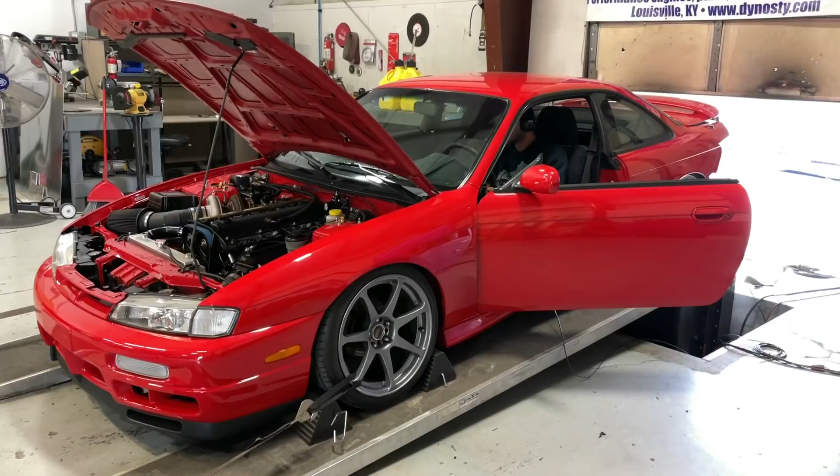Dude, my anxiety is way higher than the ceilings. Oh, usually that means it's dyno day.

All right, so it's early Saturday. In the performance industry, you don't get a ton of time to work on your own stuff. But today's the day, so the S14 is on the dyno.

We are doing engine break-in, and then we're gonna see what kind of power it's gonna make. I don't know what it's gonna do. It's a BorgWarner S300, like a 6673 is what it equates to. R154 trans, piston rod 2J with a 1JZ head.

I'm kind of excited for this. I'm a little excited for this. No long drawn out intro, just going straight to the business, baby. No clickbaity nonsense, just ready for some power.

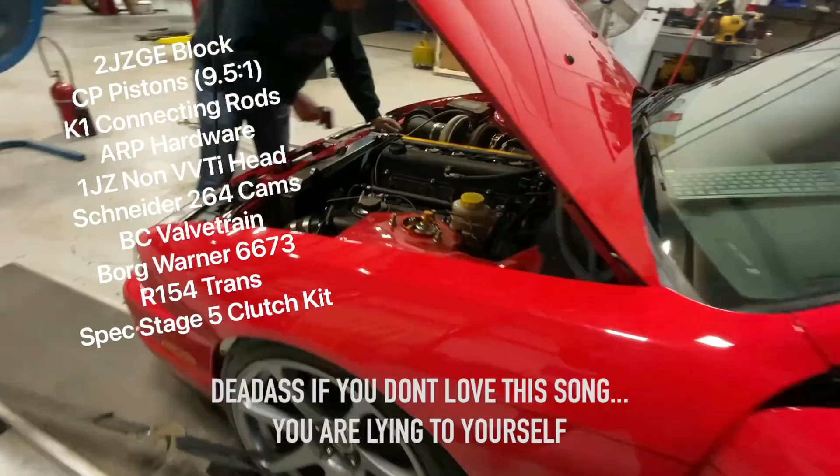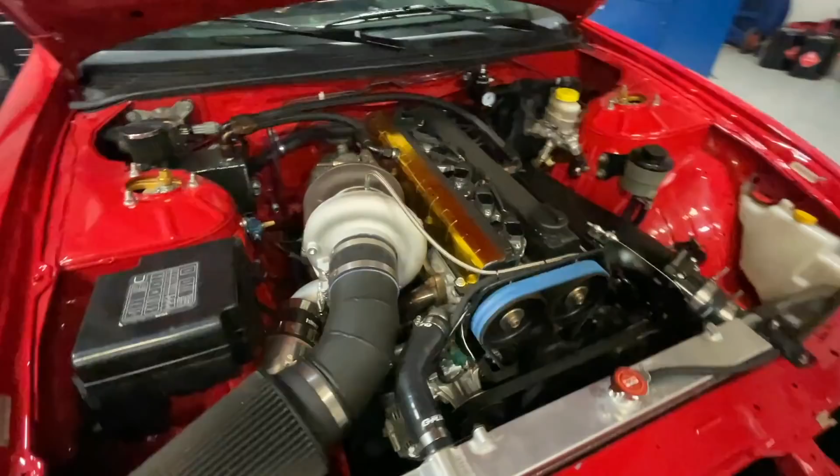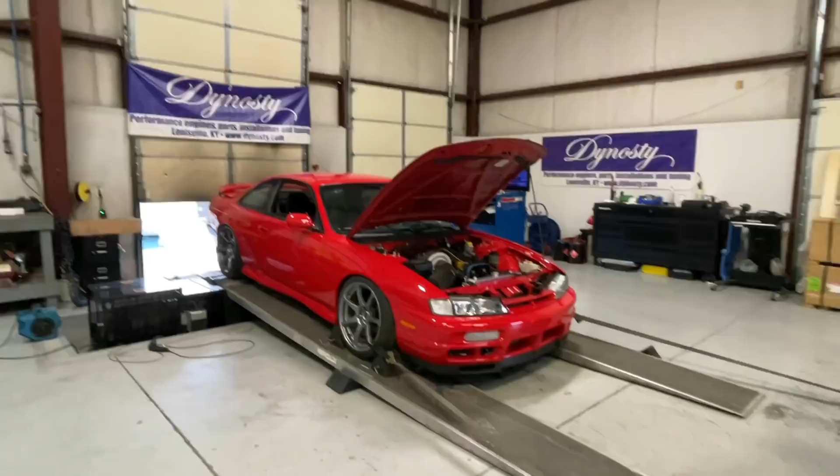I got no idea what wastegate springs are in it. I have no idea what's about to happen. So this pull, I think, is just going to be to see where boost is. And the clutch is a 6-puck spec, so if it looks awkward on the dyno, that's why.

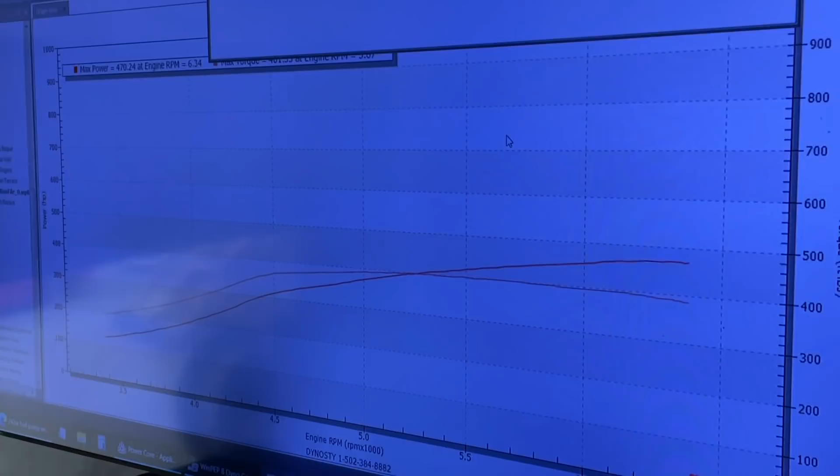I still didn't see torque yet, but the combo, just to review, is BorgWarner S300 SXE Supercore, a 9180 is what they call it, but it's effectively a 6673. So I expected it to be a little bit lazy. On wastegate boost, it's sprung for 11, 12 pounds, and that's what we just ran with super fat AFR across the board just to see what it would make for boost. It's already doing pretty damn good. So we're gonna be, in my opinion, fuel pump limited today because all it has is a single Hellcat fuel pump. Admittedly, with 2 Hellcats, I've made 1300 wheel, but he's about to make another rip.

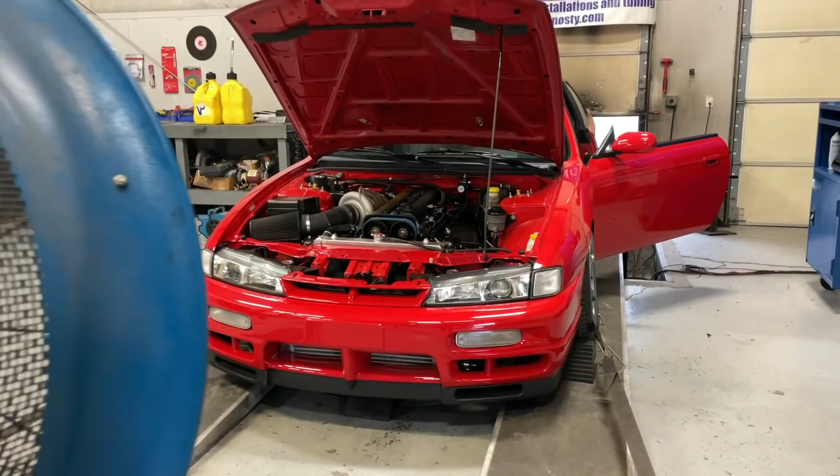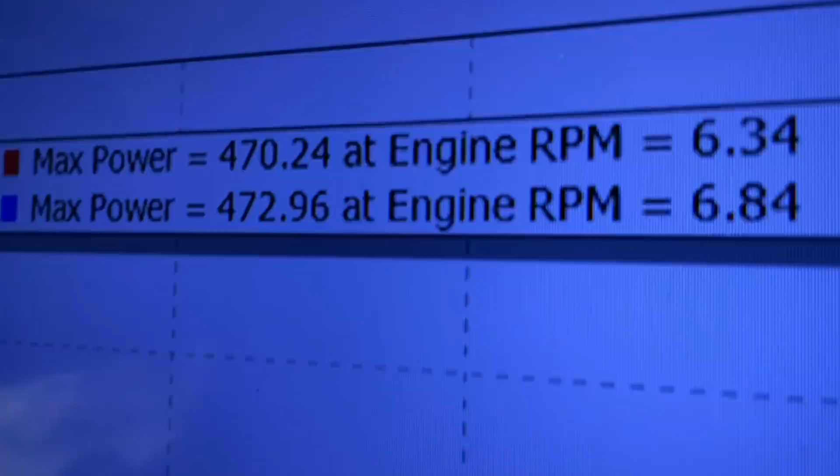We'll head back inside. Same 10, 11, 12 pounds of boost, nice and soft just to get the thing ready to rock.

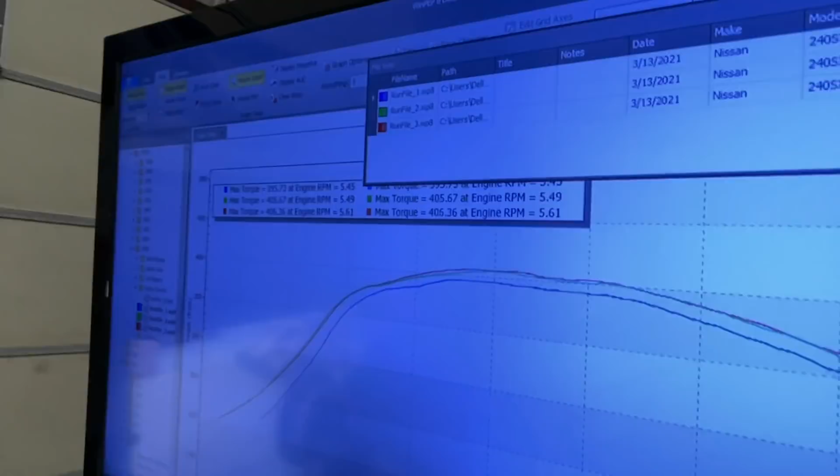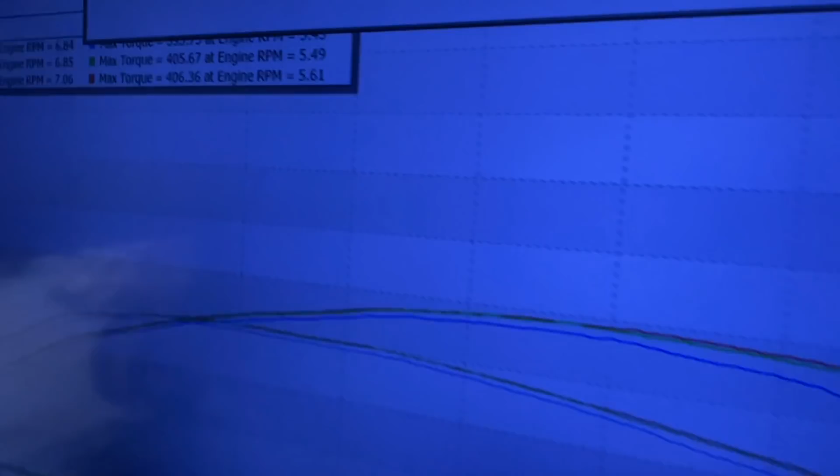Alright, still on, I think 13 PSI peak. Well, that's anticlimactic man, you only got torque up there. I bet 482. Ooh, 488, 406, okay, that's what, 13 pounds up top? So it's around 11 to 13 PSI. Peaks 13 pounds up top, but that power curve is pretty sick.

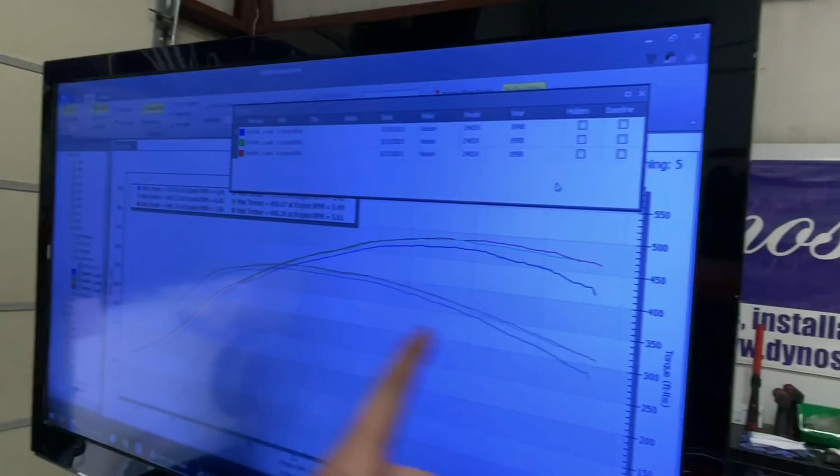You like the power curve, Bert? You do? That's weird. It's a BorgWarner turbo, if you were wondering, just as a heads up. It is indeed a BorgWarner turbocharger. He's a big fan.

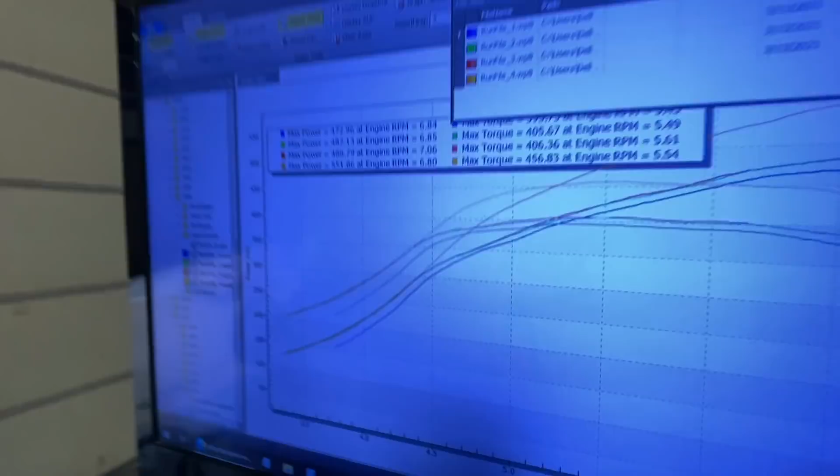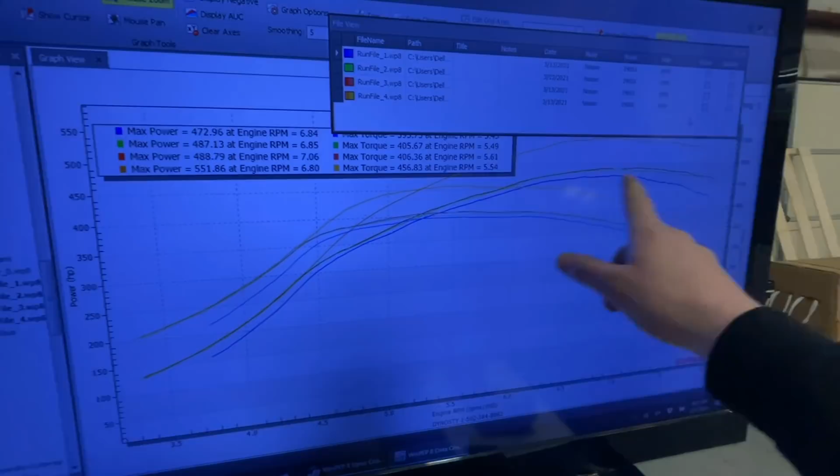All right, so this guy turned boost control on and didn't tell me, which resulted in this being 16 pounds on that last pull. So 12, 13 pounds to 16 PSI. We're at 551, 456, you can see the difference. That's just 4 pounds of boost, 3-4 pounds of boost. It's gonna be fun, man.

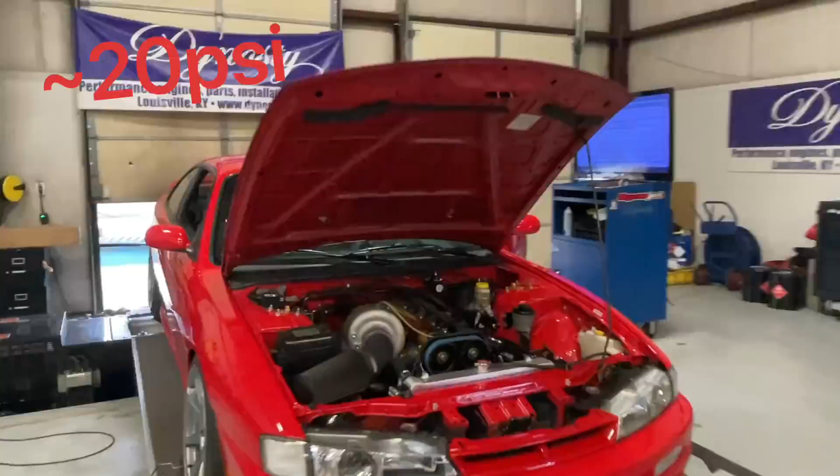All right, what'd it do? What'd it do, Bert? 626, 515. A little more boost that time, huh?

I don't even know what he did with boost control. He's gonna wing it again.

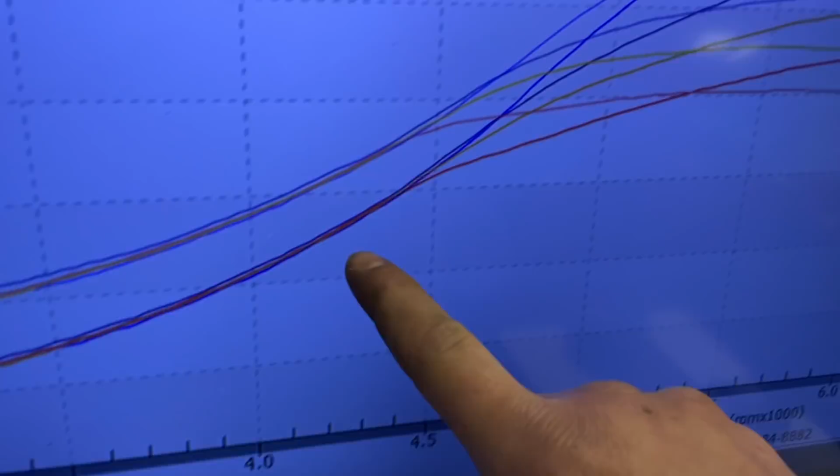It sounded like a little more than 20 pounds. Originally I thought Hal was neutered because he let off, but he said boost cut at 30 psi, so he still has testicles, which I never really doubted, just for the record. Man to man, I know you got him. However, 30 pounds of boost, you can see where she was trying to boogie. This is 626 peak, it hit 715, 606, where boost cut hit around 6,500. It was on a mission.

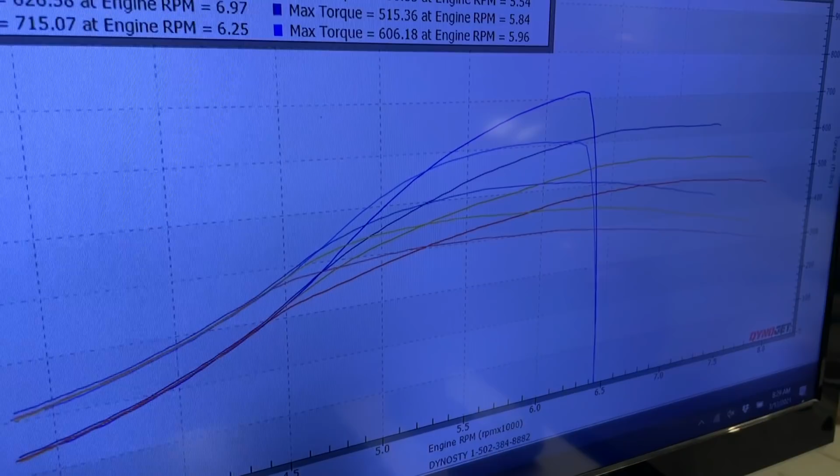So, keep going. All right, so boost cut is now set to 34. I think he dialed boost control down just a bit. We'll see what it makes. Again, this is on a single Hellcat fuel pump and a set of like 1800, 1900 cc injectors. So see what it wants to do.

I'm gonna just keep talking until he starts to drive the car, because I think I started the video just a smidge too early. Or at least I'll just do the fast forward. So like this next few seconds is gonna fast forward and you'll think that it was just a quick second.

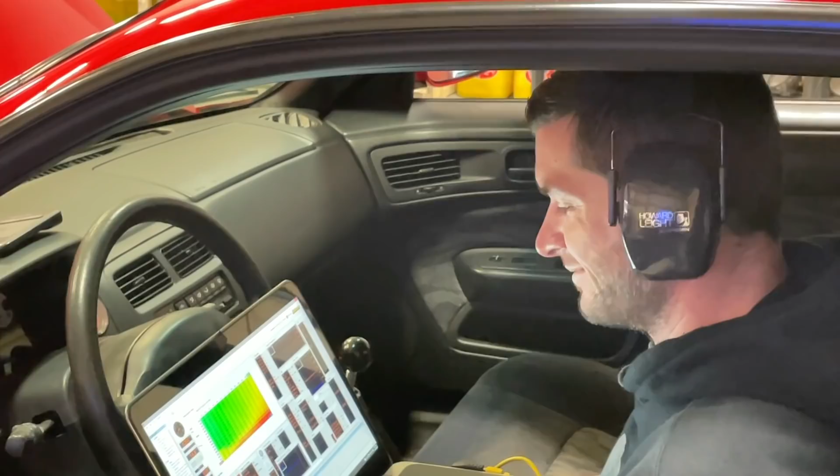Hey Bert, what do you think about the power band? It's good, right? Woo! All right, so 790, 620 at the tire.

Out of fuel pump, that's where the fuel pump starts to lay over. If your rising rate regulator is 1-to-1, right now we're shy by about 10, 12 psi of fuel pressure at the rail. The injectors are compensating for that, and they're coming up, but they're at 104% duty cycle at the top of the run, which means we are out of fuel pump.

So I'm gonna back it back down to a safe range. I say I'm gonna back it down. Hal's gonna back it back down, make a couple cleanup pulls, and this thing is ready for the sanctioned body racetrack.

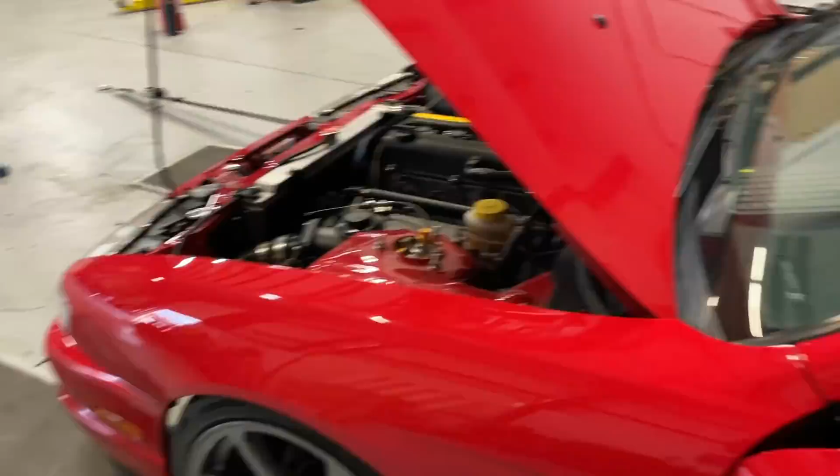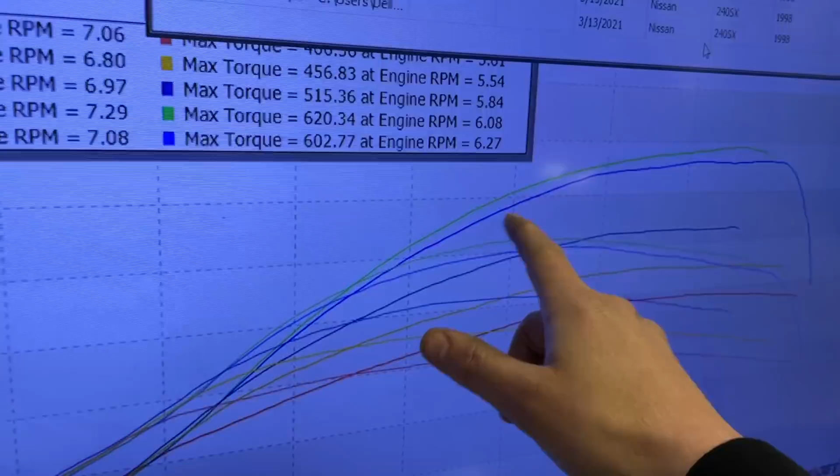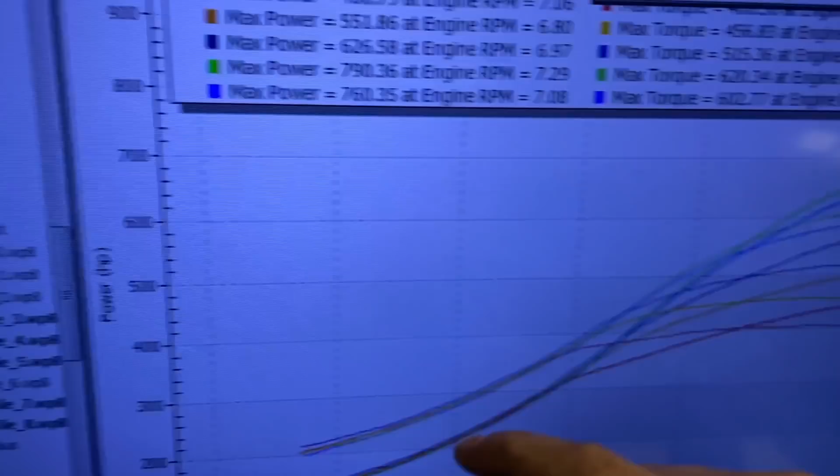Backing it back down for fuel pump safety, 760, 602. It sucks to lose that kind of power, I would really enjoy 30 more horse, but at the risk of the fuel system's safety and hurting something, this is totally fine. Only down 18 pound-feet of torque. I should note this 2JZ is on stock main caps, and everybody talks about stock main caps not being good over 750-ish. I know people who've made 1,000 on stock main caps, but that's neither here nor there. I am ecstatic with how this thing has done.

Just a slight change of plans. Instead, we're going to lower the rev limiter a little bit and pour some timing into it, and just try to make 800 at the wheel. I feel like we're so close to 800 wheel, we should probably just do that. I went up front to get oil for an oil change, and I could hear him make a pull, and I was like, that was not 750 horse. I came back and it's making 790 again with the rev limit cut to around 7,500. Can't leave him alone. You just can't leave Bert alone.

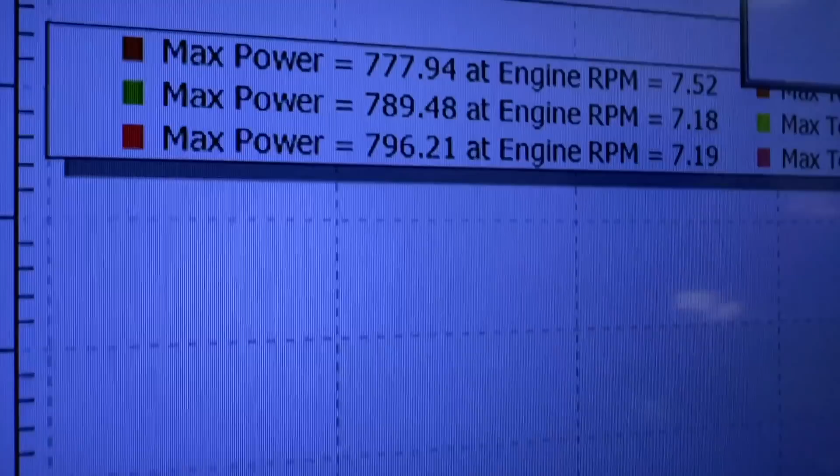Oh man, it's close. We're close. Get there, man. Where's the up arrow? I got it, here, I got it. Just give me the up. Let me have it.

Did it, bud. You're the most attractive tuner in the world. You look like Tom Brokaw's sexy twin.

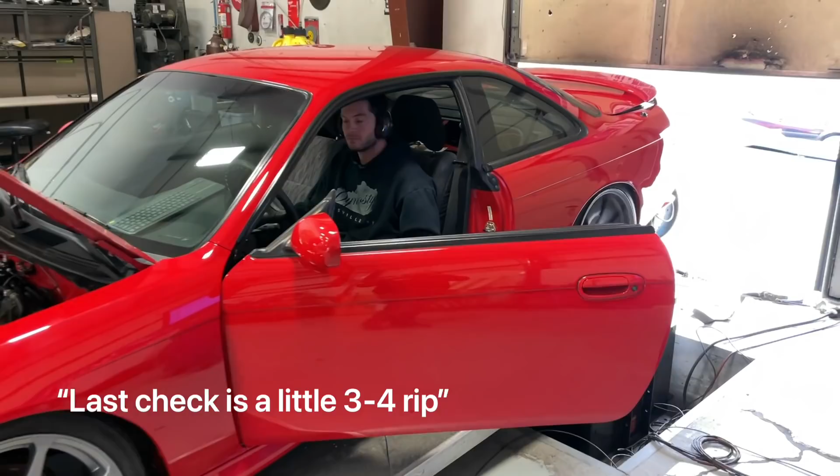Last check is a little 3-4 rip, see what stays together. He said 3-4. Hey, you said 3-4, not 2-3-4. God, panic attack, dude. My anxiety is way higher than the ceilings.

The car's sick. It made way more power than I thought it was going to make. I made the last minute choice to put it on E85. We had 93 in the tank, and I figured, screw it. If I'm going to keep the car for a little bit, I'm going to want to make more power, so I put ethanol in the tank.

Originally, the person who acquired the vehicle from me didn't have the time or resources right then to get it buttoned up. They have another project going, so I ended up buying the car back, and that's why it's still under my ownership. I don't know how long it'll be under my ownership. I usually keep things 5 to 10 minutes, but this thing is so clean, and the power band is so sick, that I'm really excited to get it on the street or sell it. Either way, I am ecstatic about the combo and the way things came together.

As kind of a wrap-up, just some notes and some people who helped make this possible. Obviously Hal at Dynasty for meeting me literally at the butt crack of dawn to get the thing on the dyno is huge. The Haltech ECU on board is awesome. The rotating assembly, the engine, all that stuff came together great. The Borg-Warner turbo, I actually got on it for a really good deal, and it made awesome power.